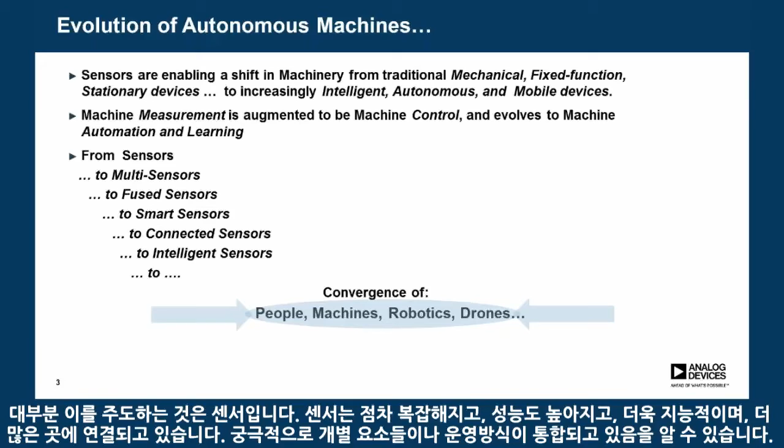So we have a broadening base of equipment or machinery or nodes in general, which become increasingly relevant to us because of rich sensor content, making them contextually aware. Many, and I would say nearly all of these nodes, involve some type of motion, or the necessity of lack of motion, which becomes a critical operation as well.

While there may be some infinite number of applications, this discussion is far less concerned with the commodity use cases and is instead focused on high-value applications, where if the designs are done correctly, there will be significant market growth as well for years to come.

These high-value opportunities are typically distinguished by some critical need at the system level. For instance, a very high level of precision or accuracy, or a drive to increase efficiency of resources, and certainly in many cases a need for higher levels of safety.

So in each case, we've pointed out some typical applications and needs. For instance, looking at a smart farm, there's a very important drive to improve the operational efficiency of the farming operation, which typically means improving resource optimization, reducing the amount of seed, fertilizer, and water that's used in any given cycle. Certainly in these cases, we need to be sensing multiple types of parameters. Their specific location is incredibly important, and some amount of historical databasing and referencing comes into play as well.

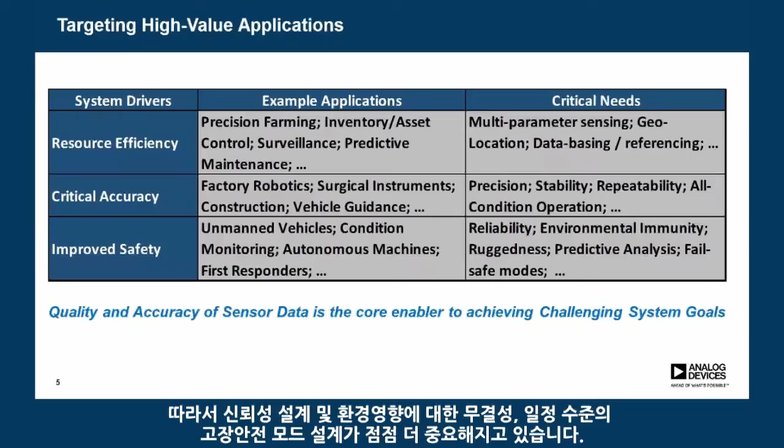And certainly most of these applications are going to be more and more concerned about safety. These are typically large pieces of equipment or very high value assets or vehicles operating in the air, so designing for reliability, immunity to environmental influences, and designing in some level of fail-safe modes is likely to become more and more important. This translates that view to specifically look at the relevance of motion for a set of the targeted applications, or more specifically, what type of motion may be important.

So you can see that geolocation, or the idea of knowing where on Earth we are, is prevalent. The level of accuracy can vary from meters for some use cases, depending on the time variable, to centimeters for equipment on the smart farm, or even to millimeters for precision surgical instruments.

But beyond geolocation, there are a number of other motion elements that become important. I'll try to point out a few of those here. Looking at the smart farm, where much of the equipment today is GPS guided, there's actually a drive to get better accuracy than the GPS itself provides. For those cases, we would use motion sensors to detect the roll and pitch of the equipment and use that information to stabilize the GPS antenna and improve its accuracy.

In the case of UAVs and drones, many opportunities for motion to add value beyond geolocation. One of those would be in the precise pointing of the payload, wherever that may be. Looking down the list, augmented reality is becoming more entertaining and precise at the same time, through the use of fusing multiple sensor types and the use of inertial sensors to very accurately point those as part of that operation.

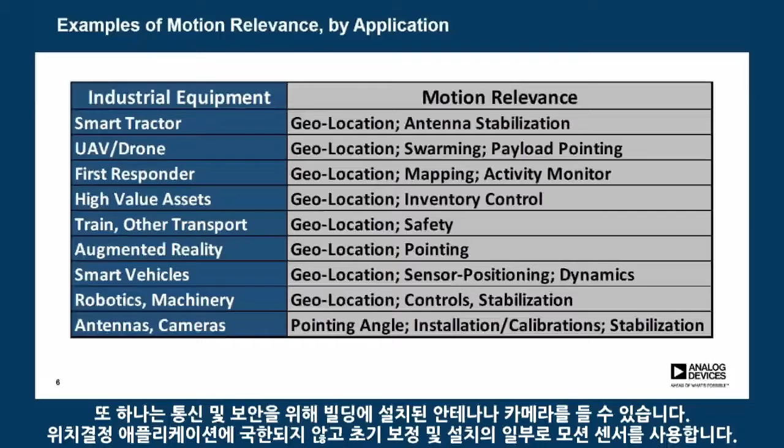Multiple autonomous vehicles—land, air, and other—offer opportunities for not just geolocation, but vehicle dynamics, dead reckoning, and accurate pointing of the multiple suite of sensors. Another example would be antennas or cameras installed on buildings for communication or security, beyond just the pointing application, perhaps using motion sensors as part of the initial calibration and installation.

Some of these applications are pictured here. As you can see, they are quite varied, but they have in common some means to detect, measure, analyze, and control motion. Normally this will be a combination of sensors, as shown in the block diagram, likely merging inertial measurement with other sensors like GPS.

Many of these applications have difficult operational scenarios where no single sensor can be sufficiently precise under all conditions. The system designer needs intimate knowledge of the intended operating states and needs to identify sensors which complement each other well for precision across all states.

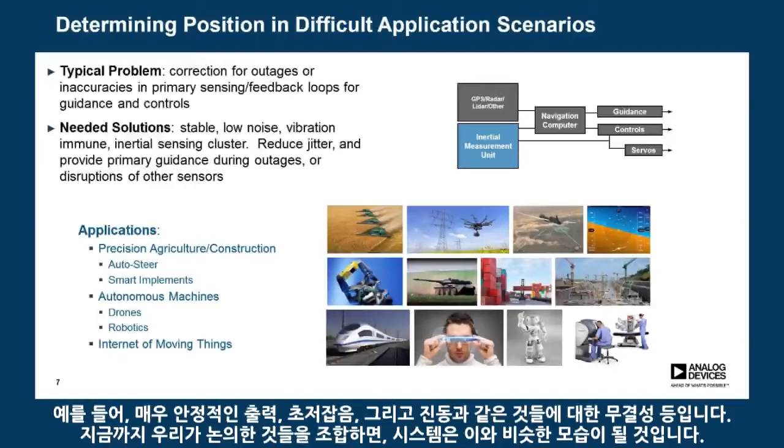For inertial sensors, which do not require any external infrastructure and do not have natural enemies such as urban canyons or bad weather blockage, the important parameters are noted here—for instance, very stable outputs, ultra low noise, and immunity to things like vibration.

If we bring together all that we've discussed so far, our system looks something like this. We identify here 6 main elements to the node: 2 different types of sensors, context and motion; 2 levels of processing, sensor fusion and application level; connectivity, whether to adjacent nodes or to cloud-based processing; and the increasingly important security. A core message here is that, despite all these elements being important, the quality of the sensor elements is fundamentally important to the accuracy and usefulness of extractable information of the node, and ultimately to the value of the system.

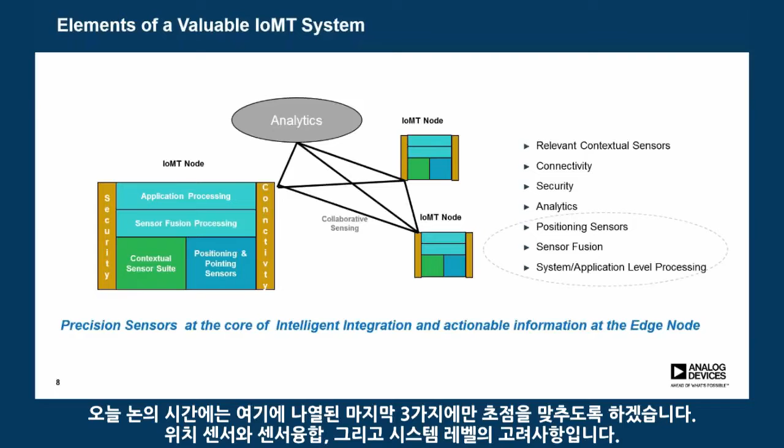The rest of today's discussion is going to focus on just the last 3 listed here: position sensors, sensor fusion, and system-level considerations. This next section is going to focus on motion sensors, how they work, what are the challenges, how different types of sensors compare in terms of accuracy, and integration options.

First, it is important to distinguish simple versus complex motion. Certainly there are applications where something on the order of up, down, left, right might be good enough accuracy. It may also be acceptable in those cases to draw a tight box around the allowed operational conditions, or at least be very forgiving of accuracy errors. Those use cases are not what this discussion is targeting. Instead, the reality of the applications we have highlighted is a much more complex scenario.

In the case of industrial applications, we will be looking for accuracy better than 1 degree, down in the tenth of a degree accuracy levels or better. Most likely, where we have multiple sensors in this application, we will also be more heavily reliant on the inertial sensors because of the states of operation, perhaps GPS denied or others. So what that means is the inertial sensors will be more heavily weighted in the sensor fusion.

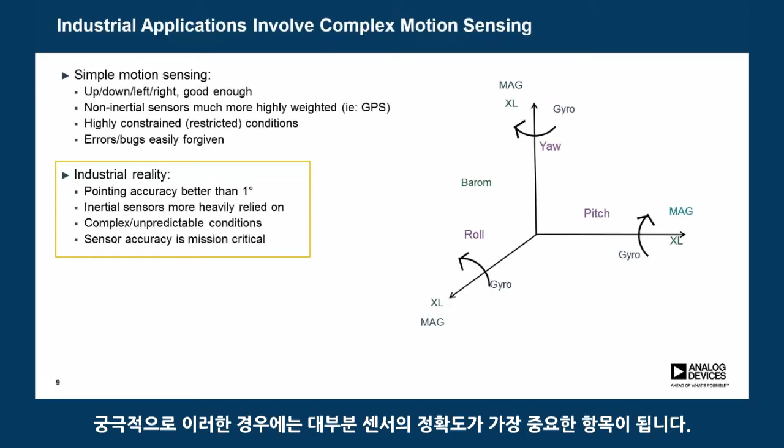It's also quite likely we will be operating under extremely complex or unpredictable conditions, and we need these sensors to be able to still reliably operate in those conditions. So ultimately, the sensor accuracy in many of these cases becomes the single most important mission critical item.

Simple versus complex can be addressed with two very different grades of sensors: low precision versus high precision, or consumer versus industrial. A high precision sensor, as I noted, will most likely be the primary sensor in the overall solution, more heavily relied on, and certainly capable of providing precision information even under these difficult conditions.

What that means is the sensor needs to provide extremely low noise, very stable operation, even under conditions of, say, vibration extremes or temperature. With that, we would be able to achieve accuracy perhaps on the order of a tenth of a degree or even better.

A low precision sensor, on the other hand, is most likely going to be simply a backup sensor to something else that is the primary accurate device in the application. What this means is it'll generally have low weighting, and would only be looked to under a very narrow set of conditions.

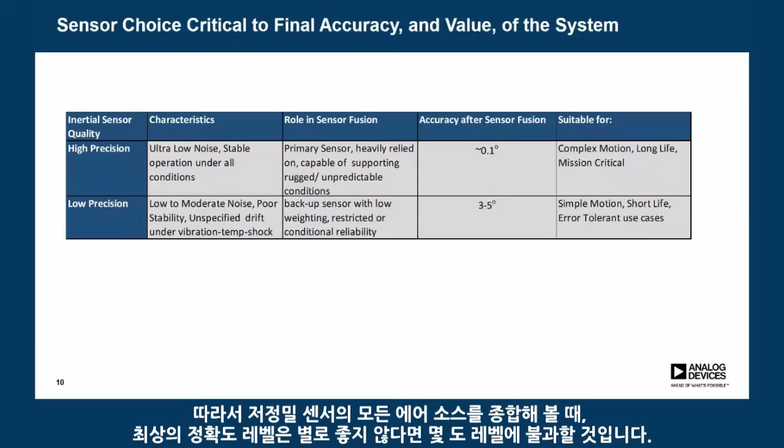Many of these low precision sensors, in fact, tend to have quite low noise because of what they were originally designed for. However, they also tend to have fairly poor stability or very high drift rates that become even more severe or problematic under conditions such as vibration, temperature, and shock. What that means is when everything is summed together, all the error sources of these lower precision sensors, our accuracy level, probably best case, is in the few degree level, if not much worse.

Before moving into a discussion on sensor operation and a designer's challenges in system integration, we highlight here some of the foremost challenges relevant to the motion sensors.

One of these being the basic level of accuracy that we can achieve, particularly in primary sensor. For instance, in a dead reckoning situation where we may be using GPS for much of the guidance, but we have a GPS blockage or denial, and we want to still achieve centimeter level accuracy.

We also want to ensure ourselves that we are choosing sensors that can maintain that accuracy under these difficult conditions, which can include, as I've already mentioned, vibration, temperature, but perhaps wind and other disturbances.

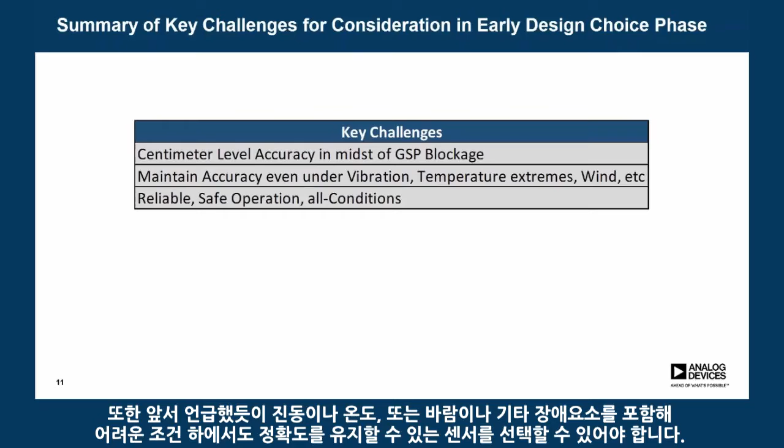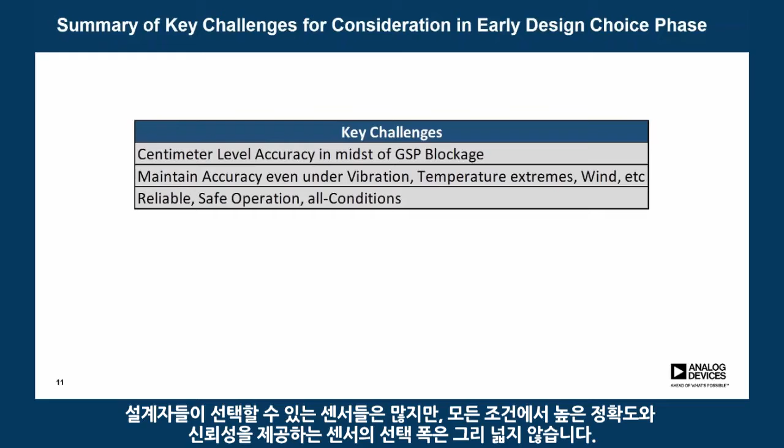And certainly we need to be cognizant of choosing devices that can provide a very high level of reliability and quality, and perhaps are not prone to things such as lifetime drift, which may not be as obvious from looking at a data sheet. So there are many sensor choices available to the designer, but many fewer choices that provide high accuracy under all conditions with reliability.

To meet these challenges, let's look at the steps or integration required between the basic core sensors and achieving reliable information from them at the system level. So this diagram is intended to show the migration or integration required between those core sensors and getting the application level information out at the right hand side here.

There's a couple key processes or steps that we need to go through to achieve that. The first being enhancing or optimizing the performance of the sensors themselves. This is typically done through additional test and calibration, perhaps some first-level sensor fusion.

One of the key inputs to this is a very high level of understanding of the motion dynamics, the general motion dynamics, and also a very good understanding of the core sensors themselves to help optimize the calibration, to focus it on those error terms that can be most problematic to not only optimize the performance but the cost.

The second half of this is typically more at the system level, involving a higher level of sensor fusion and application level processing. Obviously, this requires a deep understanding of the application to know the potential conditions, operational scenarios, and thus map the sensors that are being used in the system to the most reliable and optimal configuration.

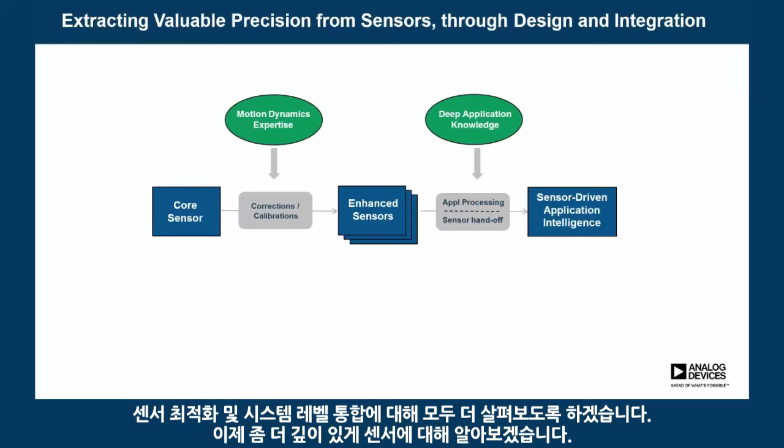So we'll discuss both steps as we move forward here, the sensor optimization and the system level integration, but we will go into a bit more depth on the sensor.

Here we are going to quickly step back for those that are less familiar with inertial sensors and point out some characteristics that are important to understand to the broader IMU discussion.

A MEMS accelerometer is much like the familiar mass spring system. So we're looking at F equals MA, where we know the mass, we can determine force from a spring constant and a displacement that we are able to detect with a differential capacitance approach, where we basically have two sets of interdigitated beams, one fixed and one movable. And when the device is under acceleration, we are then able to detect this capacitance change.

An important thing to note here is that MEMS accelerometers are sensitive to both dynamic and static acceleration. What that means is they can detect gravity as well. So keep that in mind, and we'll come back to that point in a moment.

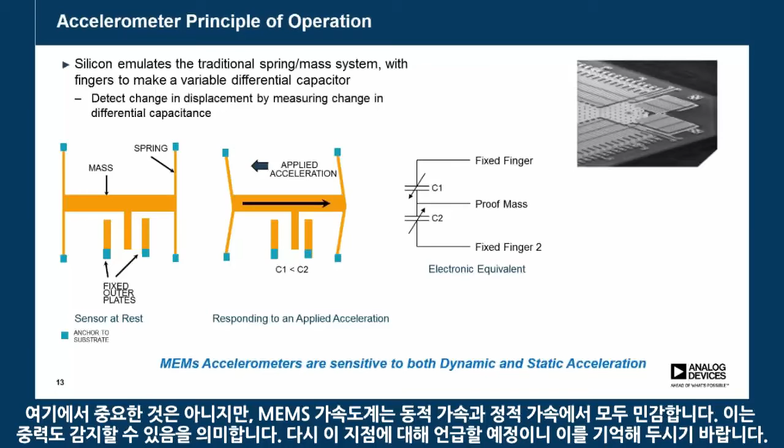Gyroscopes exist to measure angular rate. A common principle used to do this is the detection of the Coriolis force.

So if we have a mass in motion on a platform, and that platform is under rotation, in order for that mass to maintain a straight line in the presence of that rotation, it would have to exert a force on itself in the opposite direction of the rotation. And that force is called the Coriolis force. And it is the job of the gyroscope to detect that Coriolis force with a great level of precision.

The actual sensing element of the gyroscope looks very similar, in fact, to the accelerometer beam shown on the previous slide. So the reason for pointing that out is that means that the gyroscopes can also be sensitive to what we call G effect, some sort of G influence on its primary measurement of angular rate. So that's an important point.

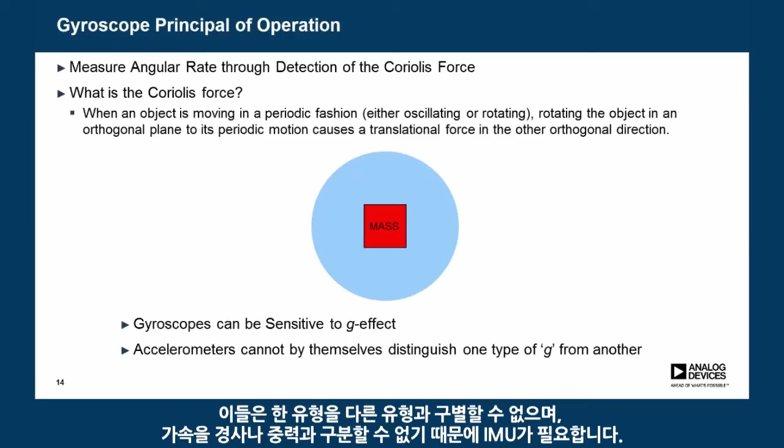Another one being what I highlighted a moment ago is that the accelerometers, because they detect both static and dynamic acceleration, they cannot distinguish one type from the other, cannot distinguish acceleration from tilt or gravity. Thus the need for an IMU.

So pictured here is a typical IMU within a larger INS system. I'll describe some of the key things here.

The light blue shading is highlighting what would typically be integrated in an IMU. As you can see, that involves multiple sensing types across multiple axes: angular rate, linear acceleration, magnetometer sensing in some cases, and barometer.

Beyond that is a highly optimized signal chain of sensor conditioning and processing. Implied in that is a very high level of calibration, which drives compensation of the sensor outputs based on the state of the device, for instance its temperature. Also involved is a high level of improvement on the alignment of the sensors themselves, so there is some first-order sensor fusion that goes on there. Typically this is anywhere from 4 to what we call 10 degrees of freedom.

On the back half of this is additional system-level processing, where we merge these inertial sensors with other navigation or stabilization sensors, such as GPS, radar, LiDAR, and others. A key input to that system-level processing is a high level of understanding of the specifics of the system, what the boundary conditions are, and what operational scenarios we'll be working under.

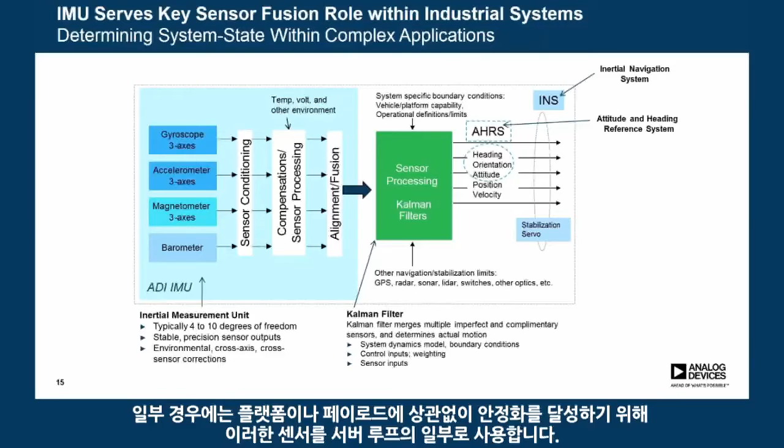All of this is combined to provide, depending on the application, heading, orientation, attitude, positioning, and so on. In some cases, these sensors are used as part of a servo loop for stabilization of whatever the platform or payload is.

You are probably not surprised to hear that there is a substantial difference between the IMU in your cell phone and the one needed to fulfill the application challenges we've described here today.

In fact, most sensors, whether low-end or high-end, typically today have fairly low noise. This is because even in low-grade sensors, they're designed for fairly short-term operation, and low noise is important in that case. So that is fairly typical. What is less typical is to have a high degree of stability amongst the sensors, so our choice of sensors becomes much more restrictive when we're looking at things like in-run stability.

When we look at the specifics of any given application, we are going to be concerned about many other specifications, things like vibration or G-effect and alignment. Basically, in many cases these are not specified in low-end sensors, and thus it would become impossible to determine the actual performance without an understanding of those error terms.

The best inertial sensors will for sure specify all of these, and more importantly, during their design phase they will go to great lengths to make sure that all of these specifications are well balanced, so no one term becomes the dominant error source.

Here's an example to better demonstrate the point that certain factors like linear G and alignment are the true enablers. Actually, they become the dominant error sources if not designed right, and can be the downfall of a system design.

The table on the upper right discusses the situation of stabilization accuracy as shown on the left, where we'd be using inertial sensors for stabilizing a payload on a vehicle. We want to achieve pointing accuracy better than a degree. We'll be concerned about the amount of jitter in the servo loop, and we'll look at least at these three specifications: noise density, linear G, and cross-axis.

We've shown the specifications of an industrial sensor here, and for a given set of assumptions, we've shown the impact on the error budget of that specification. We've done that for both an industrial device and a typical consumer device, noting that the typical consumer device does not actually specify those terms in red, so we're being fairly forgiving here for that device. But in an industrial specified device, these specifications are fairly well balanced, so none overly dominates the others, and we don't disturb the noise performance too much with linear G or cross-axis.

In the case of the consumer device, that is typically not the case, where a term like cross-axis, which is usually not very accurate, becomes the dominant error source and ends up with on the order of a 20x difference between these two devices.

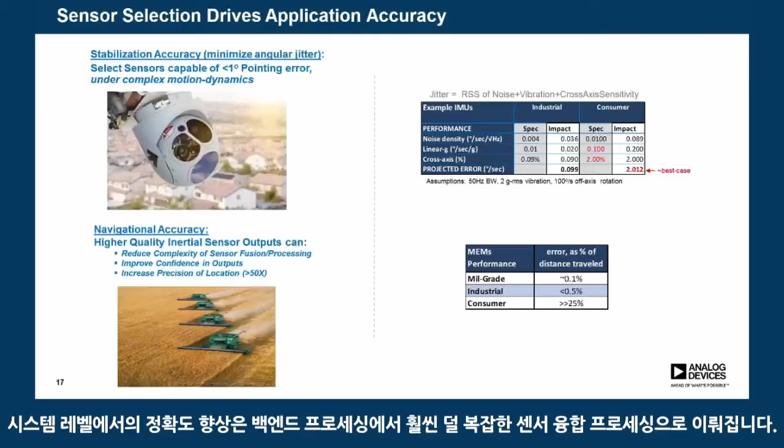And what that accuracy improvement buys us at the system level is a far less complex sensor fusion processing job at the back-end processing. Before moving on to some application examples, it's appropriate to make some comments on sensor fusion, what it is and what it is not.

One thing sensor fusion can do for us is, in the case where a given sensor has some potential drift characteristics, if we have other sensors or other information in the system which can accurately resolve these conditions, and we already understand how the sensor itself drifts under those conditions, we can use all that information to do some correction on the sensor itself.

Sensor fusion would also be used to hand off from sensor to sensor based on the weighting determined by the application, the operational scenarios, and our understanding of which sensor maps best to any given state. So two key roles. But sensor fusion cannot fix what are poor quality sensors to begin with, and I'll try to demonstrate that point with a conceptual example here.

Two cases: consumer dead reckoning. Typically, the sensors used in a device like this, for instance a mobile phone, would be used out of convenience. What sensors are already there, and how can we use them for a particular app to give us some navigation aid?

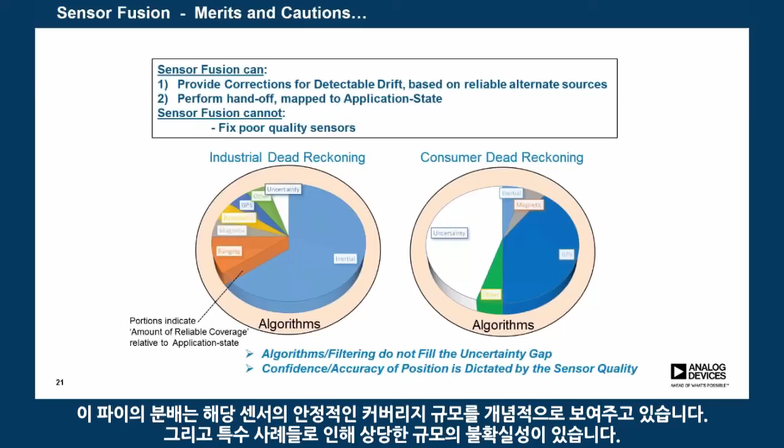In that case, GPS will be the predominant sensor relied on for the navigation. And because the other sensors were not necessarily chosen to give extremely good coverage under a GPS blockage, we end up with a large amount of uncertainty. The portions of the pie here are supposed to conceptually show the amount of reliable coverage from a given sensor, and because of that particular use case, there's a large amount of uncertainty.

On the other hand, in an industrial application, normally we'll be choosing sensors specifically for the job at hand. We very likely would be looking at much higher grade inertial sensors to provide a more reliable level of coverage, particularly when we have a GPS blockage. So the other sensors, still quite reliable in certain instances, but perhaps less heavily weighted. The weighting here might get flipped, but the point is we have much more full coverage, a much lower level of uncertainty across the full state.

Now algorithms exist around all this to help tie it together and do the sensor fusion. The key thing is the algorithms themselves don't fill that leftover uncertainty gap. So the quality of the sensor becomes extremely critical to the overall accuracy.

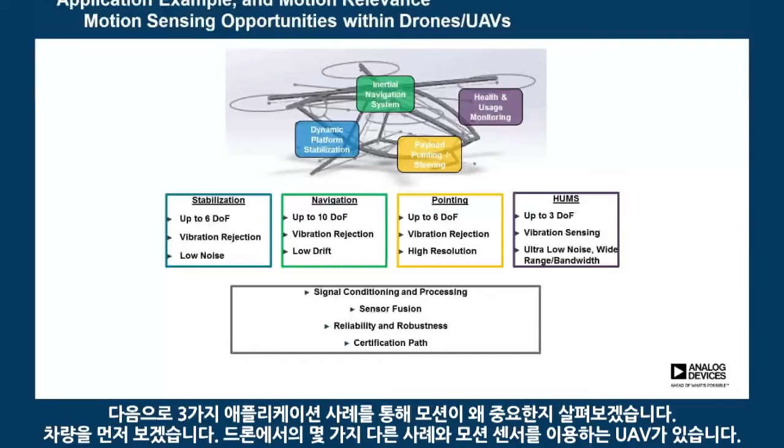So next we have 3 application examples to discuss why motion matters, starting with unmanned vehicles. Here we're just pointing out a few different use cases in a drone or a UAV for the use of motion sensing, could be for vehicle dynamics, for basic navigation, or as noted before, pointing of the payload.

In all 3 cases, we're most likely looking for very low drift, low noise sensors, multiple sensing types and multiple sensing axes. And because of the dynamics of the vehicle, the conditions it operates under, we want these sensors to be very good at rejecting vibration influence.

On the other hand, another use case would be health and usage monitoring, where in this case we don't necessarily want to reject vibration, but we want to very accurately sense it. In that case, we would look to a very different type of accelerometer, for instance, that has not only low noise, but a wide dynamic range and wide bandwidth.

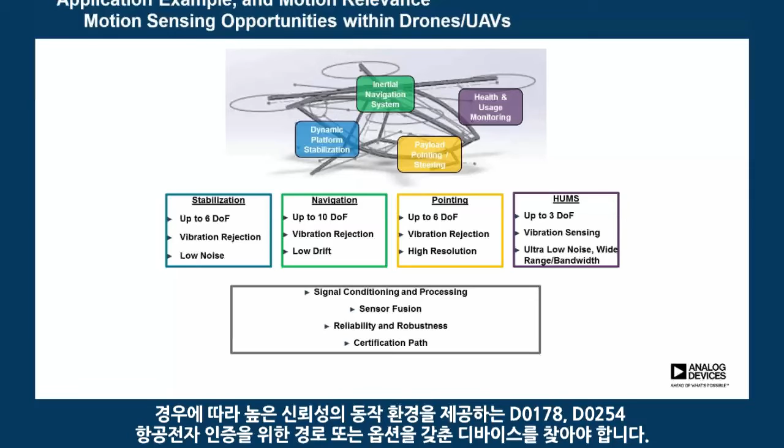Wrapped around all this are some of the things we've noted: signal conditioning, system-level sensor fusion, high reliability, and in some cases, we may be looking for devices which have a path or an option for DO-178, DO-254 avionics certifications, given the high reliability environment that they operate in.

In this case, we would be very reliant on extremely low drift inertial sensors, but we're also looking for some very high quality additional sensors in sensor fusion, since prior to relying on the inertial sensor, we want to have a very good understanding of our absolute location, and we may use other sensors such as ranging to help determine that.

If we think of this as asset tracking, and more specifically high value asset tracking, we can broaden the use case beyond first responder, and we may then analyze the system designs in a similar way, identifying appropriate sensors by phases.

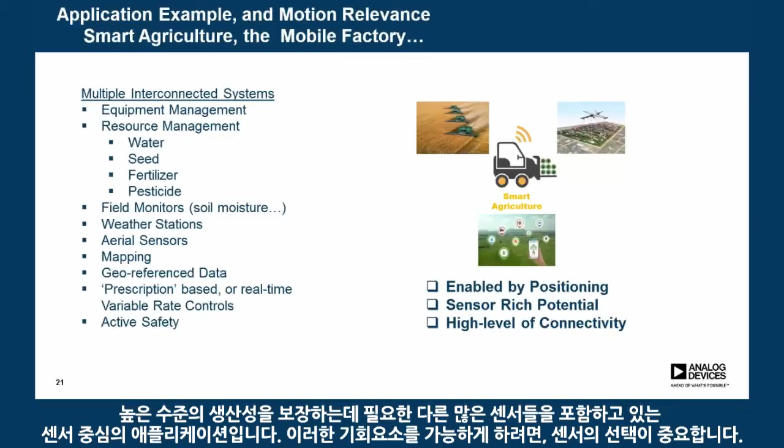Sensors or equipment on the ground, in the air, in the ground, other variables to consider such as weather, historical data, and also very heavy equipment being operated and a high concern on safety as well. So this is certainly an area that is enabled by a very highly accurate position sensing capability, but overall it's a very sensor-rich environment, many other sensors involved to accurately do this job, and certainly a high level of connectivity as well.

To enable any of these opportunities, sensor choice does matter. Specifically, we've been looking at high-value applications, many of them emerging, where the level of market acceptance and the rate of growth is certainly going to be somewhat risked by the ability to provide high level of performance, safety, reliability, and so on. The challenge is doing that without compromising some of the other system-level goals.

Basically, in many cases, it will come down to a couple choices. There's certainly an attraction on the level of system designers to look at the cost attractiveness of consumer-grade MEMS. Obviously, there's compromised performance to be considered there, and because of that, there typically is going to be a fair amount of added costs from additional tests, more calibration, and probably just yield loss.

On top of that, there will be a need, because of the complex environments that these sensors are trying to be used in, for additional packaging at the system level to dampen vibration or to thermally isolate the devices. In many cases, sensor fusion would be relied on for some sort of fixing or attempted fixing of the lower quality sensors, and there's obviously some concern of the usefulness of that. There's many other concerns: obsolescence, reliability, packaging level concerns about MEMS devices that need to be considered.

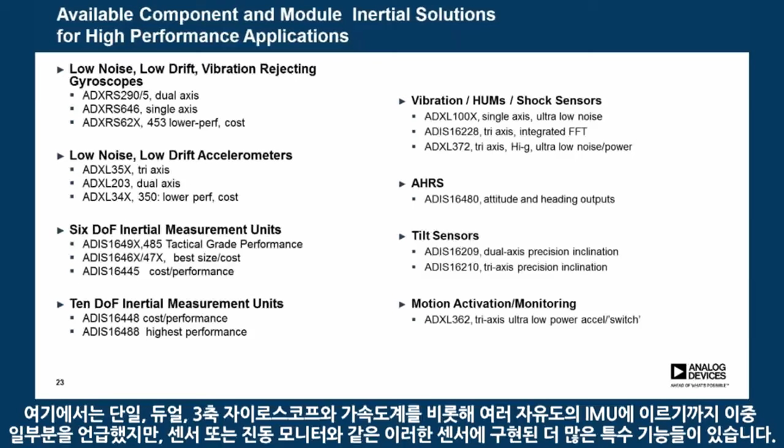I've highlighted some of them here, from single, dual, triple axis gyroscopes and accelerometers to multiple degrees of freedom IMUs, and to some more specific functionality built around these sensors, such as tilt sensors or vibration monitors. And as well, an important capability in ultra-low power acceleration sensing for always-on sensing.

Perhaps you may already be familiar with the solutions available today and their characteristics noted on the left, but I also want to point ahead to advances over the next several months. Our highest performance IMU line, which today already offers best performance for price, will be enhanced by 5x or more in performance. And our compact performance line, which emphasizes performance density and is today the market leader, will be previewing

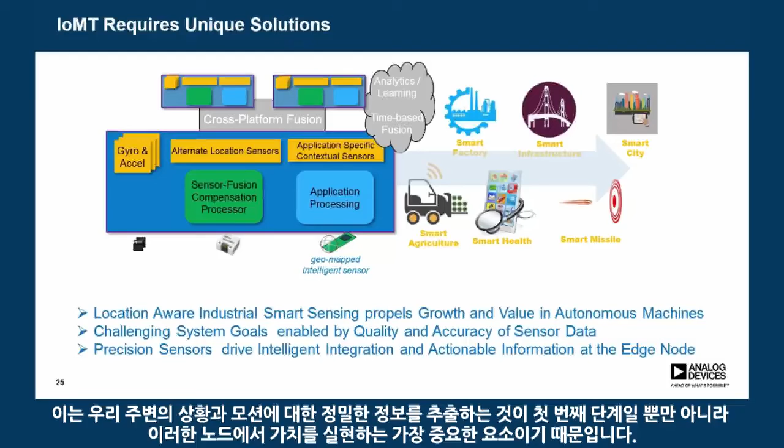significant gains on all fronts: performance, size, and cost efficiency. Finally, I hope the discussion today has painted a picture for you of both compelling designer-level challenges and exciting market growth opportunities in the world of autonomous machines. We have emphasized the importance of the quality of the sensors at the core of these IoMT nodes, because extracting precise information on context and motion from the world around us is not only the first step, but

the most critical to enabling value at these nodes. I do thank you for listening and encourage you to look to these additional resources for more information. And I'll pass this back to Chris.

Thank you, Bob. Now let's jump right into Q&A. Here's our first question. Is it possible to use less integrated sensors, such as an accelerometer only, or is a full IMU really necessary?

Okay, good question, and a fairly typical one when looking at these type of applications. And the answer is certainly highly dependent on the application. While it's certainly possible to attempt some of this with a single sensor, typically that becomes quite difficult. One of the reasons being, as I pointed out, that no one sensor does a fully accurate job of sensing its environment under all conditions. And as noted, an accelerometer not being able to distinguish between gravity and acceleration, or tilt and acceleration, is thus not able to give a highly precise level of positioning under some of the complex environments we talked about. And that's where we need to typically merge in a gyroscope, if not other sensors, to get a more complete view across all conditions of what's happening.